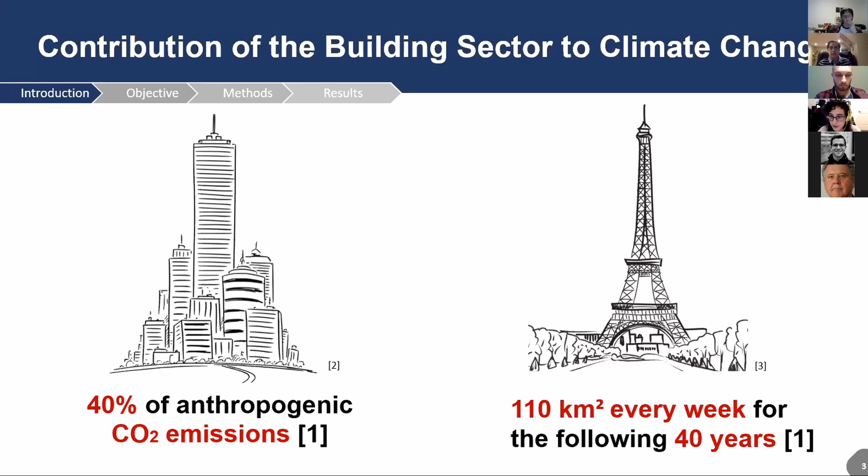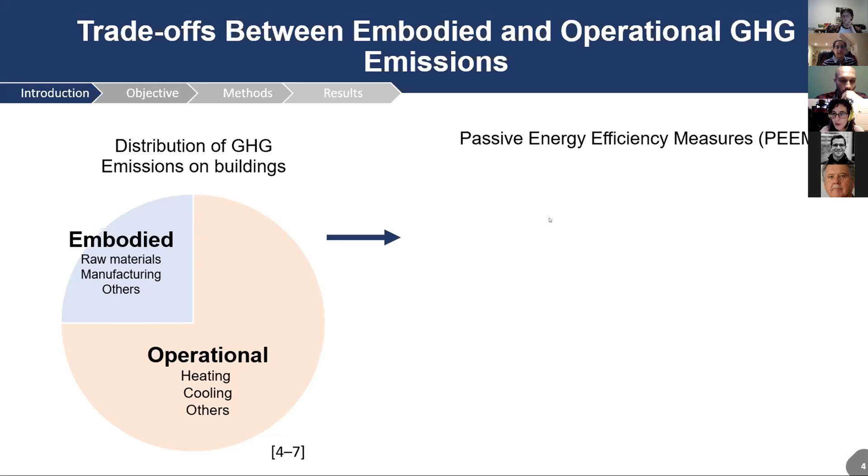So in a building, greenhouse gas emissions are typically divided into embodied and operational emissions. And as you can see in this pie chart, operational emissions typically comprise the major portion of total emissions. And this is one of the reasons why most of the efforts have been focused on improving the operational performance of buildings. Some of the strategies to do so are called passive energy efficiency measures.

An example of these measures is, for instance, adding more layers of glass to the windows or adding more insulation to the walls. The problem is that this increase in material quantities can also result in more embodied emissions. And these trade-offs between embodied and operational emissions might be offsetting any apparent emission reductions, generating counterproductive results.

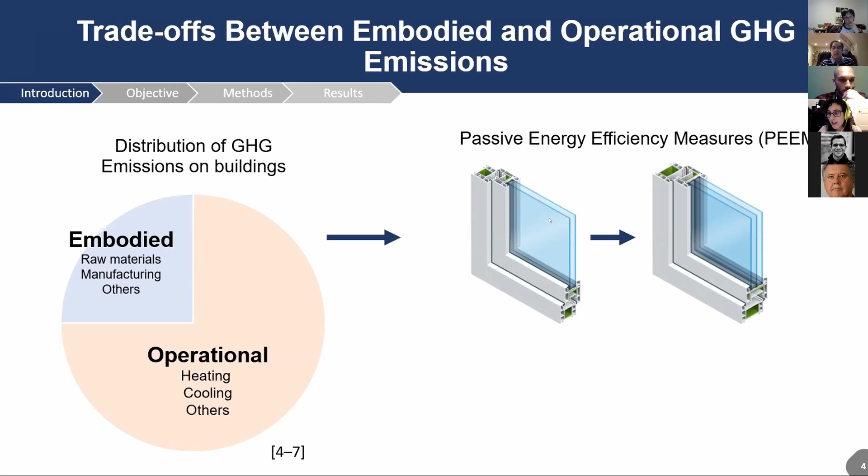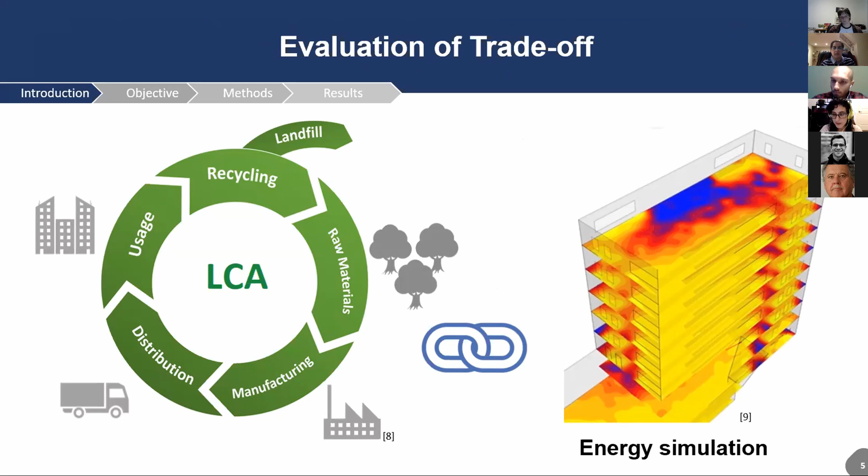So to evaluate this trade-off, researchers have proposed strategies that combine life cycle assessment and energy simulation. However, there are some gaps and limitations in current work. First, we couldn't find studies done in North America, just in Europe and Asia. Second, we couldn't find studies done for high-rise buildings, just for low and mid-rise. Third, we noticed that previous studies have evaluated a limited number of alternatives, which also limits the application of the results.

And fourth, and the most important one, we found that previous studies usually consider parameters such as weather and electricity grid as invariable conditions throughout the service life of the building. And this neglect of environmental, technological, and policy changes that might occur in the future might be producing misleading results.

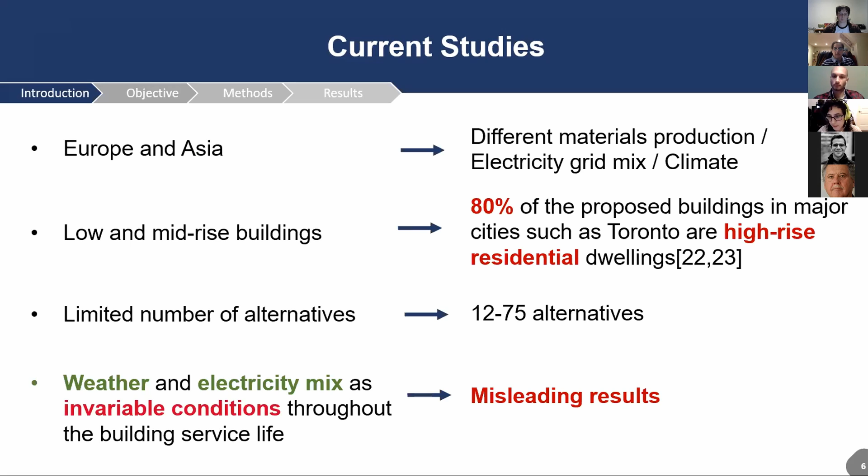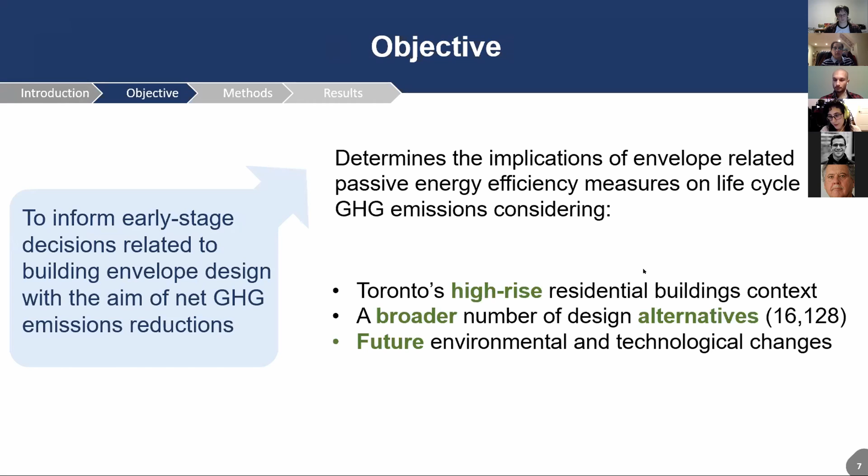So the objective of my research was to inform early stage decisions related to building envelope design with the aim of net greenhouse gas emission reductions. And to do so, we determined the implications of envelope-related passive energy efficiency measures on life cycle greenhouse gas emissions, considering first, Toronto's conditions for high rises, second, a broader number of design alternatives, and third, future environmental and technological changes.

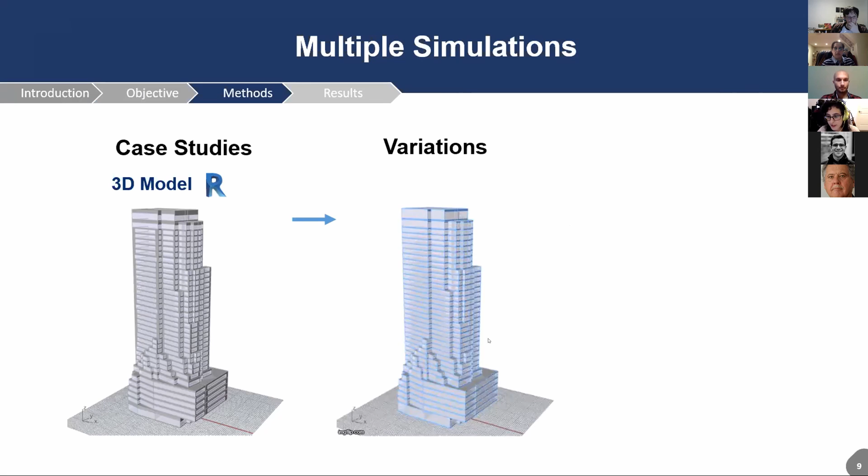So how did we do it? In simple terms, what we did was first model three case studies in a 3D environment. Second, we created multiple variations of those buildings by applying different levels of passive energy efficiency measures, for instance, changing the window to wall ratio or changing the insulation material, as you can see in this animation. Then we conducted energy simulation and life cycle assessment for every single variation. And to automate this process, we used a visual programming software, Grasshopper.

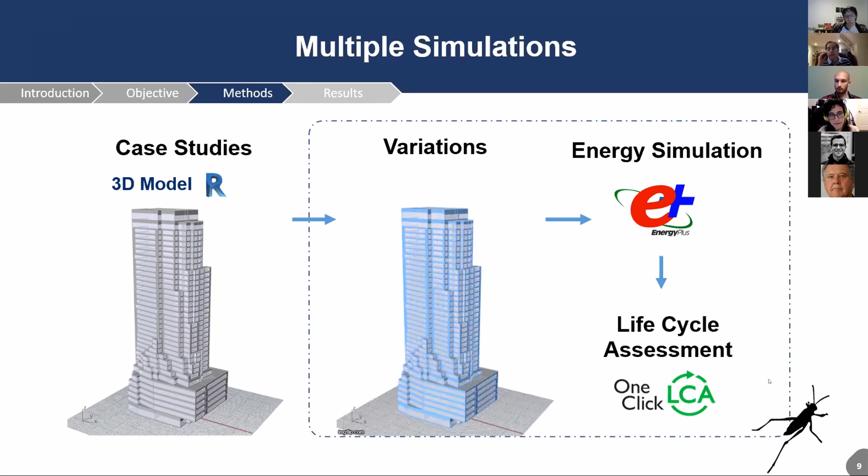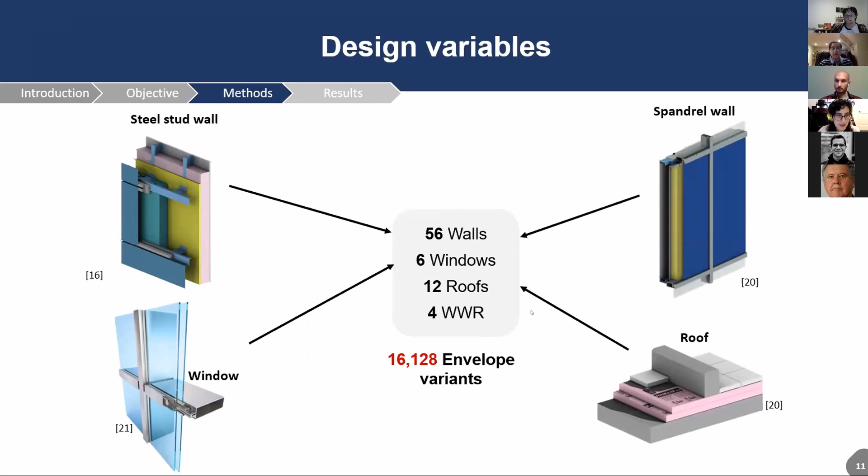So for the design variables, we proposed 56 types of walls, 6 windows, 12 roofs, assemblies, and window-to-wall ratios, resulting in more than 16,000 envelope variants. These changes were done changing the insulation material, the insulation thickness, the number of glass layers, and the frame material of the windows. Lastly, we considered possible changes in climate and energy sources by using projected weather and projected electricity grid.

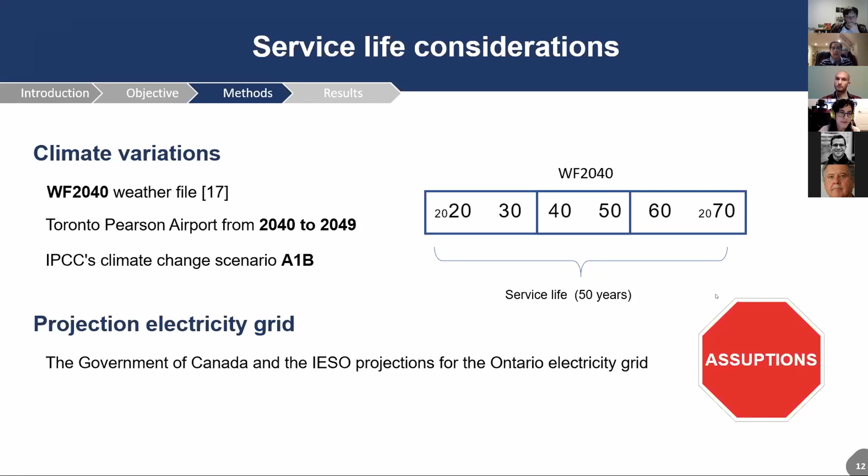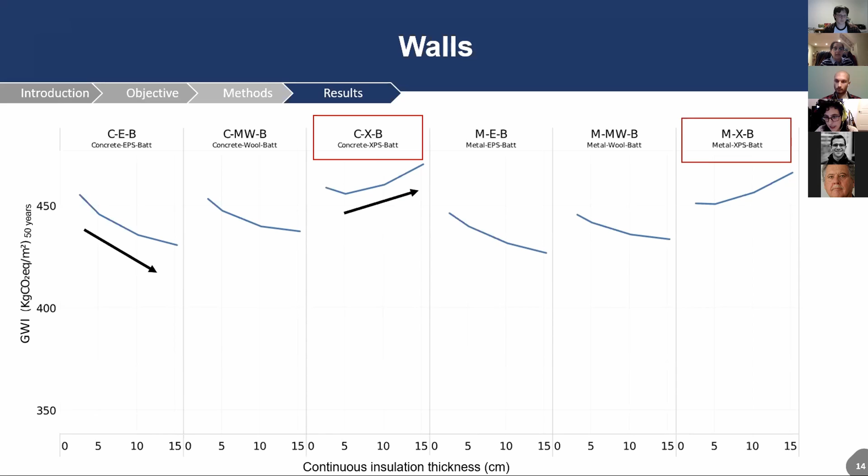But for these two wall types, something different happens. There is no significant reduction for improving the insulation, and in fact, you can see a slight increment in the emissions. And what these two wall types have in common is that they have XPS as continuous insulation, which is a carbon-intensive material. Just comparing XPS with EPS, XPS is more than 13 times more carbon-intensive than EPS, so the addition of this material considerably increases the embodied emissions, intensifying the trade-offs. And this behavior is repeated regardless of the window type used.

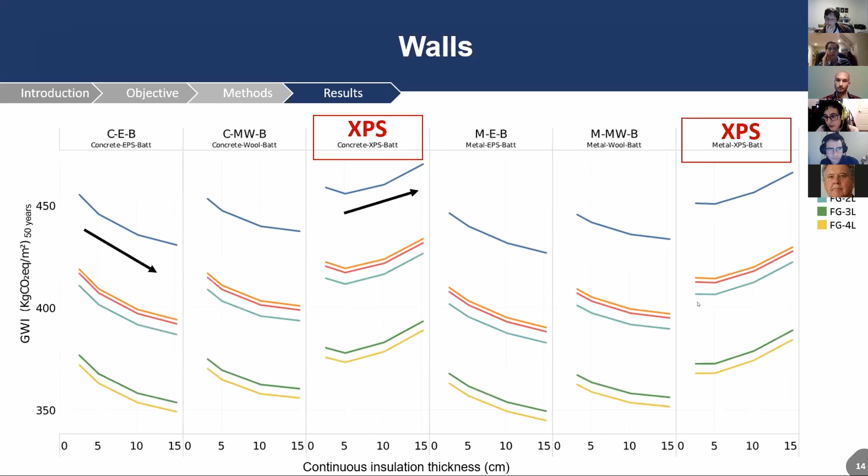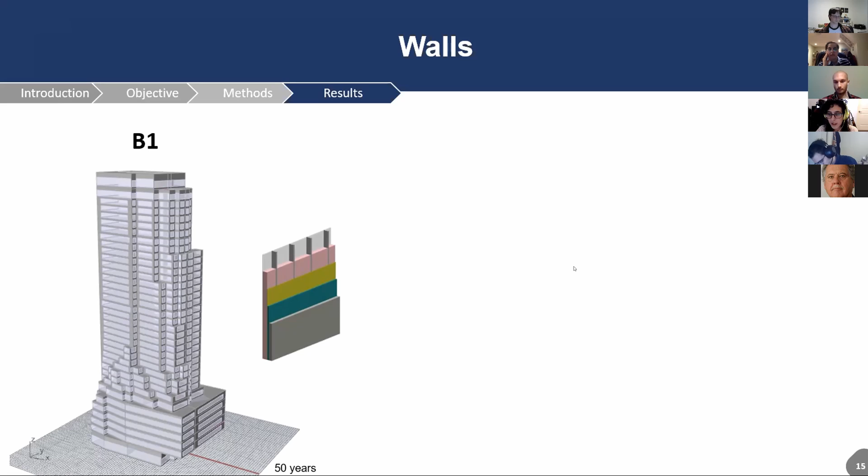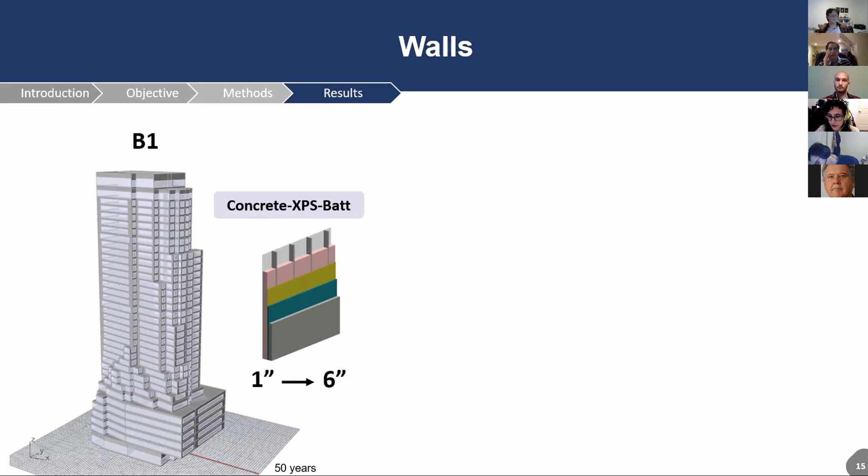But let's put these results a little bit more in perspective so we can see the impact of the results. So let's take building one, and let's say that we have this type of wall, which is a concrete wall with XPS as insulation. And let's say that we want to increase the insulation from 1 inch to 6 inches. So if we were looking only at the operation, which is the business as usual approach, well, the results are great. After 50 years, you will save 1.5 kilotons of CO2 emissions.

But if we consider both embodied and operational emissions, well, you won't save anything. And in fact, you could increase about 0.5 kilotons of CO2 emissions. And this is why we must include embodied emissions into the decision-making process. Otherwise, we can implement something that looks great, but that in the end is worse than actually doing nothing.

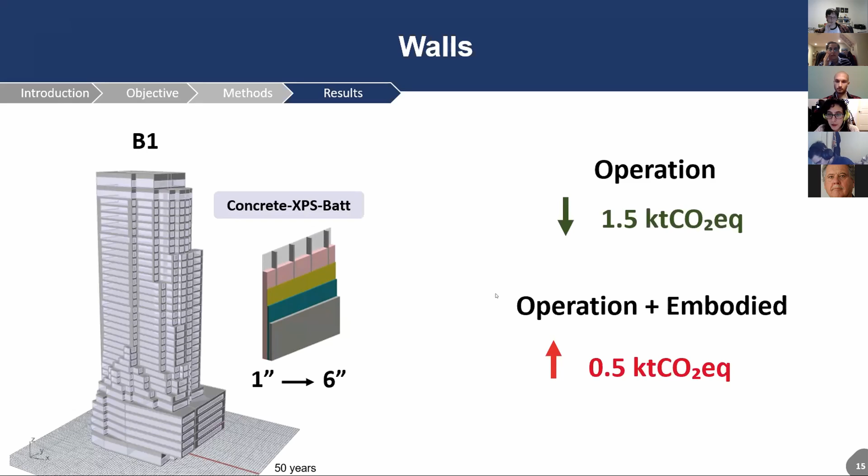So now, more than the specific conclusions of this research, I would like to share two lessons: first, always question the business as usual approach. And second, design not only for the present, but also for the future.